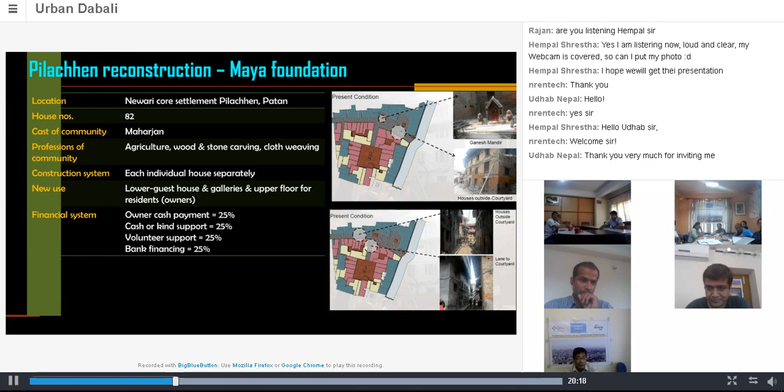Cash or kind support can be 25%. Volunteer support, they get through this Jyapu Samaj, 25%. And also they are thinking through microfinancing for the remaining 25%.

Another interesting concept for the reconstruction is they have tried to develop it into heritage tourism. What they proposed is the ground floor may be galleries or commercial activities, restaurants, or other things. The first floor may be homestay, and the upper two floors the house owner can use.

This homestay and gallery concept doesn't work in all areas, but along some major routes around the courtyard it should work. The concept itself is good.

They also came up with designs not just for the elevation of individual buildings, but for the whole neighborhood area, buildings around the courtyard also. This type of urban design helps a lot to convince the local people and earthquake affected communities.

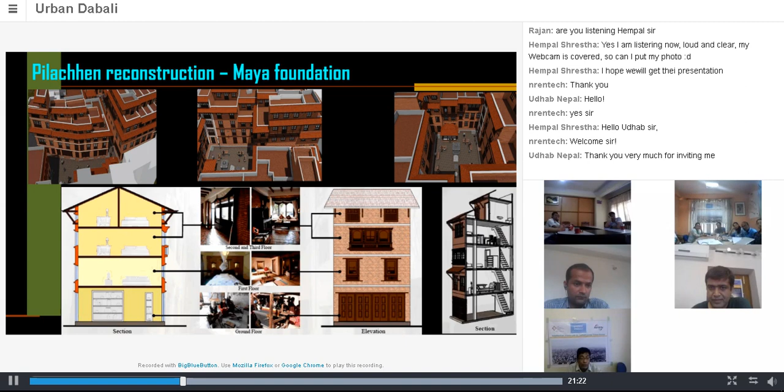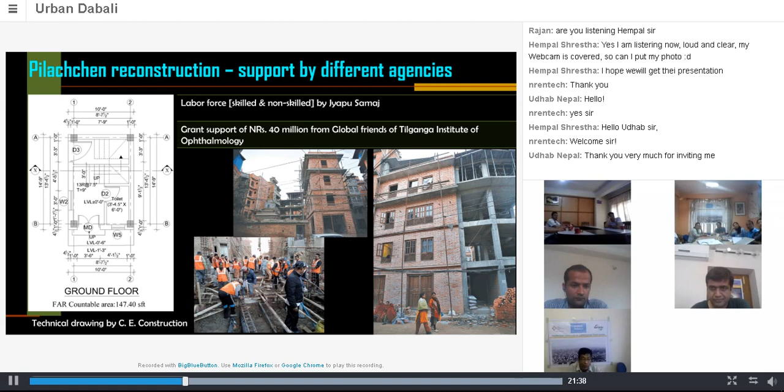So these two cases, they took different approaches. Some aspects are common, like the engagement of the community. If you see the reconstruction outcome, in the case of Balthali, they have completed around 59%. In the case of Bulung Dolakha, the reconstruction work completed is more than 95%. But in the case of Pilachhen, out of 82 houses, so far they have completed only 16 houses. So we can see the differences between Kathmandu and outside Kathmandu.

So from this quick review, what are the successful parts in these two cases? For the case of Caritas, the successful part is that housing reconstruction is linked with livelihood improvement programs, and also linked with cash for work. They also gave extra Nepalese rupees, around 50,000, as transportation expenses, because most of the houses are located in the hilly area, so they gave this extra amount for the earthquake-affected families.

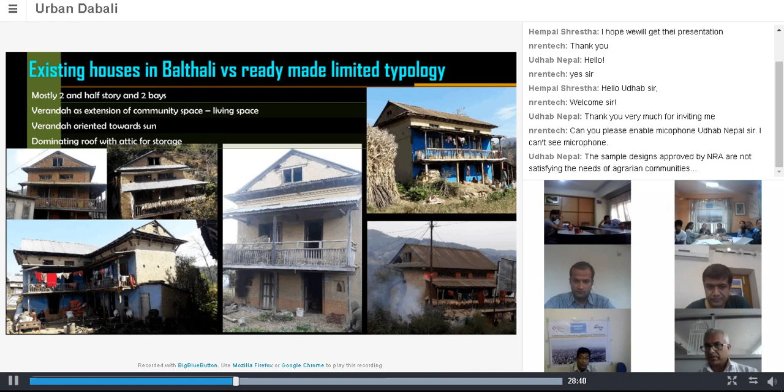Now we are rebuilding like this type of things: 1 story, either brick and cement mortar, or stone with mud mortar. Earlier there was a wide gap in front of the buildings, but now it has become a small narrow lane, because most of the earthquake victims rebuild their houses in front of the plot they have.

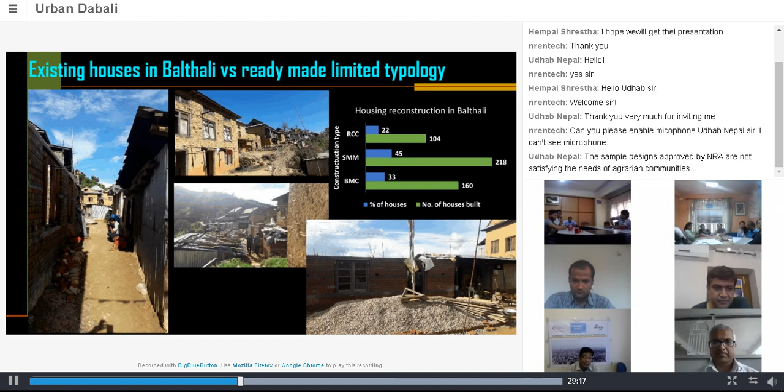Earlier that area was used for socialization places like this. In some cases they have even converted the new 2-room house for an animal shed, because the two room area is not adequate even for a single family.

So another figure I have shown here. The existing earlier house has a veranda on the 1st floor, but the newly built housing typology doesn't have any veranda, any socialization space. This type of thing looks small, but it will have a lot of negative implication in the longer term.

Okay, now we are talking about this safety structure, whether the newly built structures are safe or not. In one way, they are safe because we are following the building code. We are reducing the span. We are reducing the number of stories also.

But on the other hand, some of the photographs I have shown you, that 1-story RCC building was rebuilt at the edge of the mountain. There was a landslide on the surrounding area, so I don't know how they put the foundation of this.

The photograph below shows the newly constructed brick and cement mortar house attached with the existing stone masonry wall. I don't know how they put the foundation for that. In the next earthquake, there will be a pounding effect. From that way, we can say that is not safe.

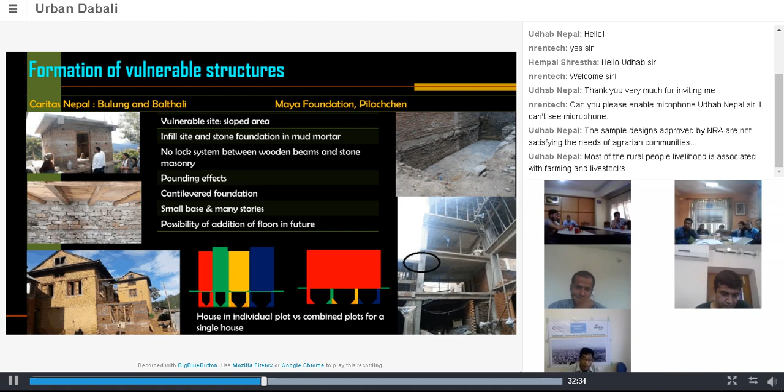Okay, this is again the cost effectiveness I'm talking about. You can see this small one-room building, it will have just one toilet, one small room, and one staircase. On the left side, I've shown earlier, before the earthquake, it's the case of Pilachchen area. It was a single house, and in a single house, you will have a small wooden staircase.

But now, they divided this single plot into 2 houses for the 2 sons. So you can see the 2 houses, and around 50% of the space is covered by staircase.

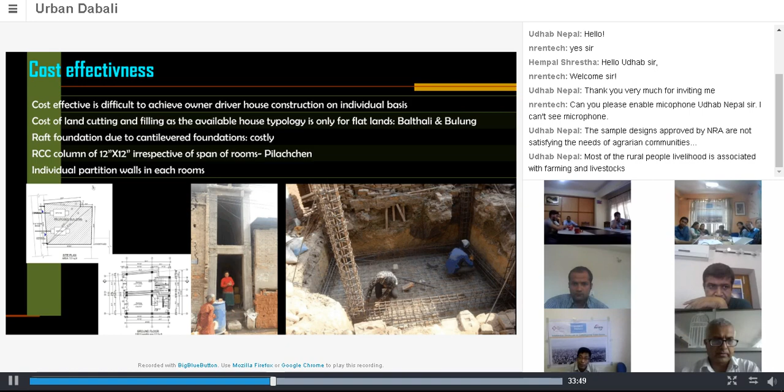So in this case, when you divide the single house into different floors using staircase, this wide staircase and other things, you will not have adequate habitable space to accommodate the earlier, before-earthquake period family members. So the earlier concept of using these spaces for galleries and homestay, in reality it doesn't happen, because the available space is not adequate even for the family members.

Now talking about the fast delivery systems, because our approach is owner-driven approach. In owner-driven approach, it's actually very difficult to achieve fast reconstruction, because each household needs to go for the permit, they need to plan, make drawings, and hire a contractor or other works.

In the case of Balthali and Bulung, because of Caritas technical support, and also because for the reconstruction work they adopted a PARMA system. PARMA system is the self-help system for reconstruction. If your neighbors come to rebuild your house, you are also supposed to go help with others' house reconstruction. Because of that system, compared to the houses of the core area, the single housing units at Balthali and Bulung are comparatively easy to reconstruct, so we find faster reconstruction there.

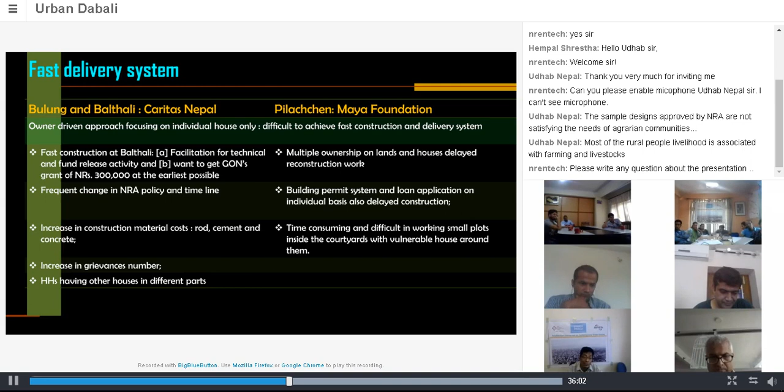If we consider this whole area, 82 areas, as one project, and get a building permit at once, it would be very easy and we could save time. But the municipality, the local metropolitan city, didn't agree with that. So they need to get a building permit for each individual house, one by one. Because of that, the reconstruction is going comparatively slowly.

So all these weaknesses I just mentioned, how can we solve them? It is possible to address some of these issues. We have tried this for the case of Bhaktapur.

We did 2 projects after the earthquake. One project is at Tekacho, ward number 16, again the historical core area of Bhaktapur. That project was a JST, Japan Science and Technology project, done in collaboration with University of Tokyo. The other project we did at Byasi and Jela, done by the master's program in urban design and conservation at Khwopa Engineering College.

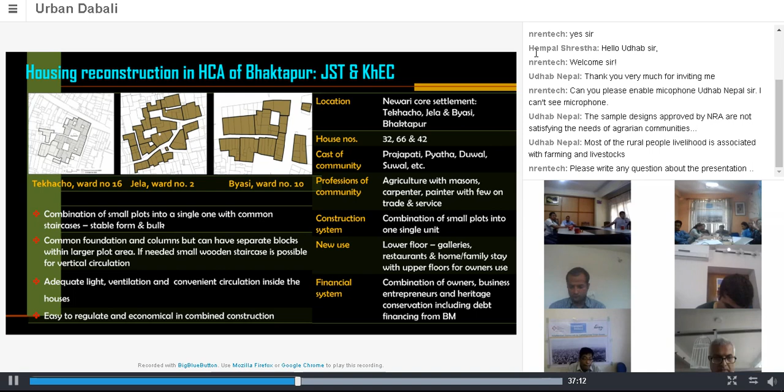In this project we proposed to combine small, tiny, elongated plots into one. And if we do that, what is the impact? We did the calculation of the habitable area for the cases of Jela and Byasi.

We took two cases. In one case, each individual house owner rebuilds their house on their small tiny plot. In the second case, we tried to combine at least 4 small plots into one single house, with common staircase, common circulation, and common foundation. We tried to see the differences between those 2 cases.

What we found is, first, there will be a significant increase in habitable space on the ground floor. Compared to individual house construction on individual plots, combining 4 plots into a single house, you can increase the habitable space 3.87 times on the ground floor, and 2.11 times on the first floor. This increase in habitable space depends on the size and shape of the plots.

In the case of Byasi, all the plots are elongated, so there we see the ground floor increase is 10.37 times, and the first floor increase is 42.18%. That's a huge increase of habitable space.

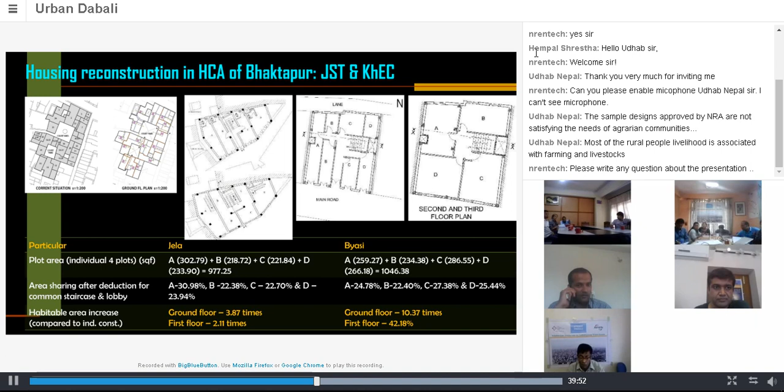So what we have proposed is this type of combination of small plots into one. We also did that at the Tekacho area. This is one actual case: there are 4 different plots. One plot, number 32, is a very small plot, with a width of just 5 feet.

That person actually cannot rebuild the house as per the new building bylaws, because 5 feet is not adequate, even for this case, 2 cases. So what we propose here is...

Like I said earlier, combination of a plot. But combination of the plot and built as a single house is not a flat system. Because in the historical core area, most of the people don't want to stay on the ground and first floor because of inadequate light and privacy.

So what we did is the common circulation area, all those 4 participants must contribute equally. And the increase in habitable space can be contributed. They can measure based on the percentage of the land area.

So by this way, actually, we did a rough calculation also. The construction costs can be reduced by 25%. That's a huge percentage because we'll be reducing a number of these columns, walls, and even the raft foundation also.

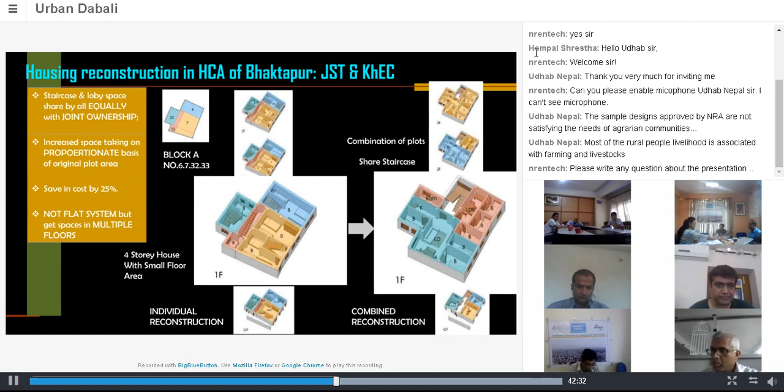So when we were doing this project, we are not only focusing on the buildings. Equally important is the infrastructure also, because the whole neighborhood was damaged. In this Tekacho area, there are 2 big courtyards.

So we also proposed an integrated infrastructure, at least the water supply line, sewer line, or maybe telephone line, electrical line also, so that each household doesn't need to connect to the main line. This is the best time to lay out the infrastructure. Another point, we also propose present modern day issues like rainwater harvesting, solar system, and other things.

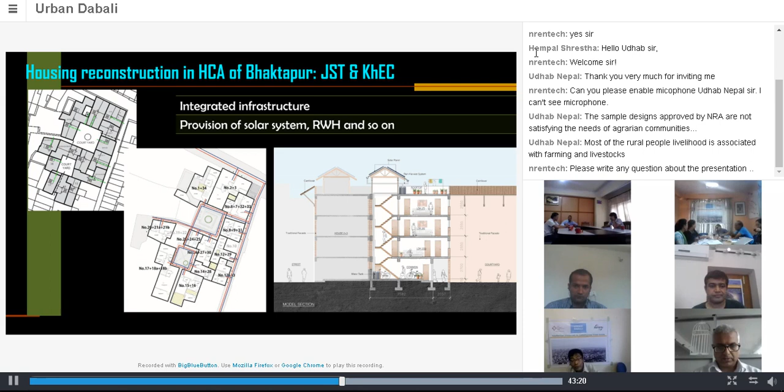So at the end, what I want to conclude is, broadly speaking, instead of owner-driven approach, community-based approach is much better in many ways. In fact, in both cases, they have applied a community-driven approach in many aspects.

So what the community did is, the amount of money, 3,00,000 rupees, another community member, as masons, took that money on his behalf, and he rebuilt, he took the responsibility of rebuilding the whole house with that money. So that is the beauty of the community-based approach, so that they don't need to migrate to other places.

Like in the case of Pilachchen also, because of engagement of these volunteers and earthquake victims, they were able to rebuild some of their houses. They were able to come to consensus with the architectural facade design also. So that is also, if we can apply this for the planning of the area, if not the whole area...